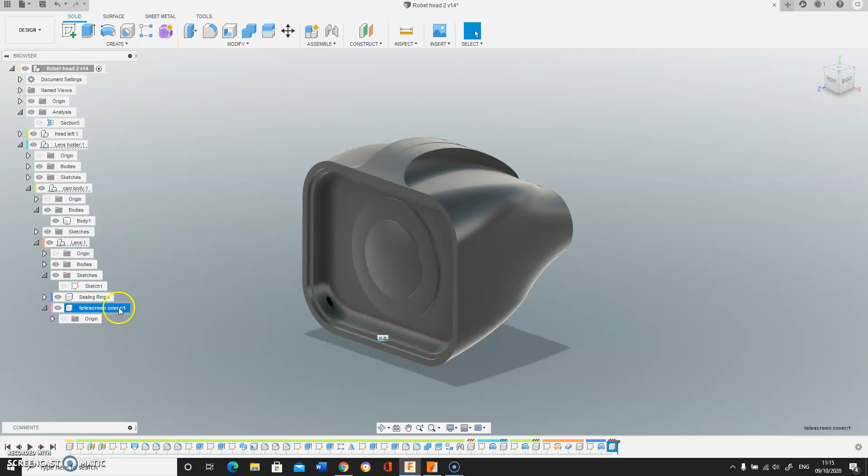In this video, I'm going to make a screen to cover all the lens and everything like that. I know you've already got a lens cover in here, but I want to make another one just to fit into this groove. So I'm going to start with a sketch.

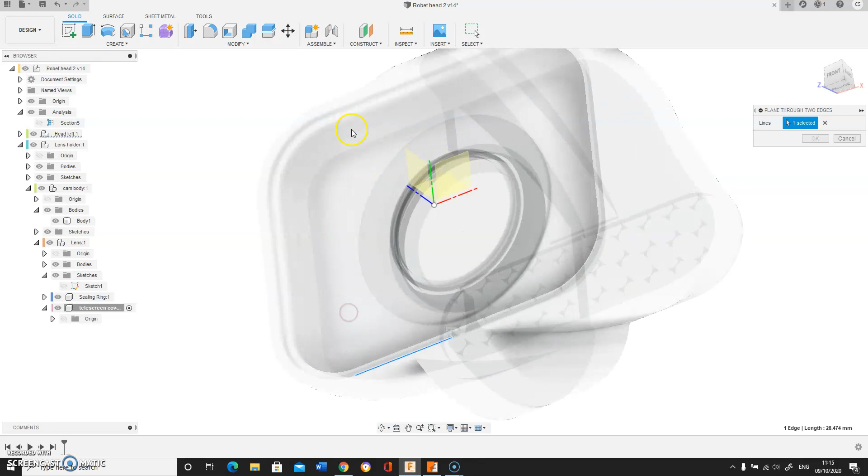I want to sketch it onto here. Now, when I select, because this is two parts, it could give me problems. So what I'm going to do first is create a sketch plane to work on. I'm going to choose the bottom of that inside edge, and the inside edge there, and it's going to generate a plane for me to work on.

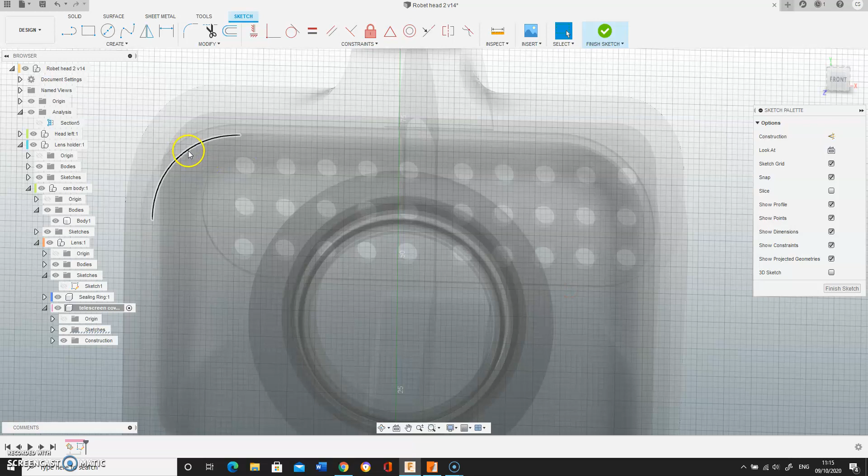So I'm going to sketch onto that plane, and I want to work inside that edge. If you look at it, it's not that edge, which is the inside edge, it's that edge there. So I am going to project that edge, make sure I'm nice and straight on, and go around and select carefully that edge.

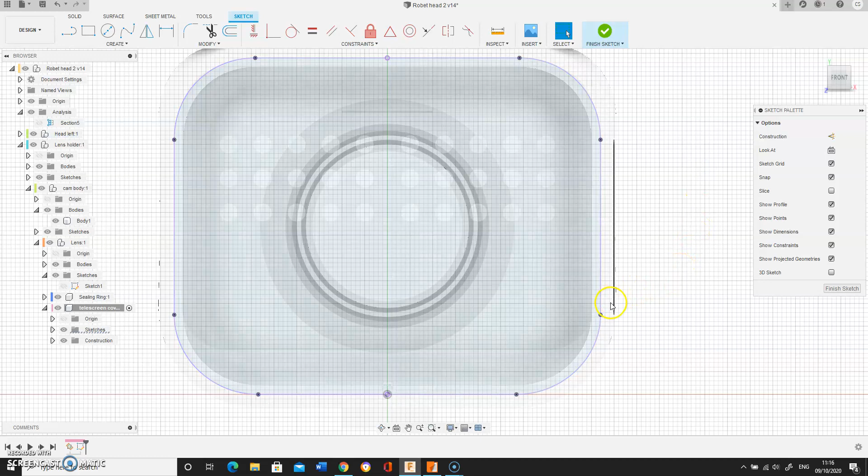So I've selected that edge like that. And I want to say OK, and it should go that nice blue color to tell me it's a complete enclosed shape, and I want to finish that sketch.

Now I've got that, which I can then extrude, and I'm going to extrude it, let's say a nice round number, to 5, like that. Let's have a little look at how that looks from above.

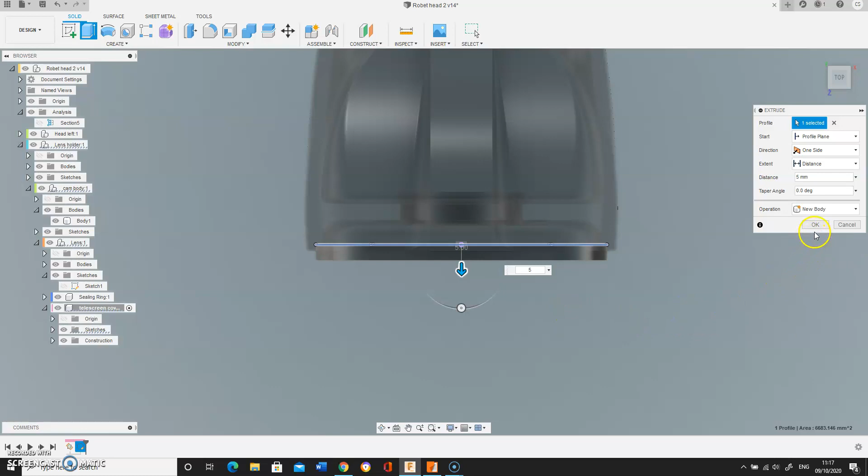Now I can see that's sticking out quite a way from the edge of my object. In reality, it would get damaged, and you'd probably want to recess it back into the inside of that cowl of the actual screen to give it a bit of protection. But I'm not that worried about it because this isn't real, is it? So I'm just going to leave it sticking out like that.

But what I'm going to do is fillet that edge. Now again, I could just go in here, choose my constant radius fillet, and fillet it back in. So let's have a little look to see what that looks like inside.

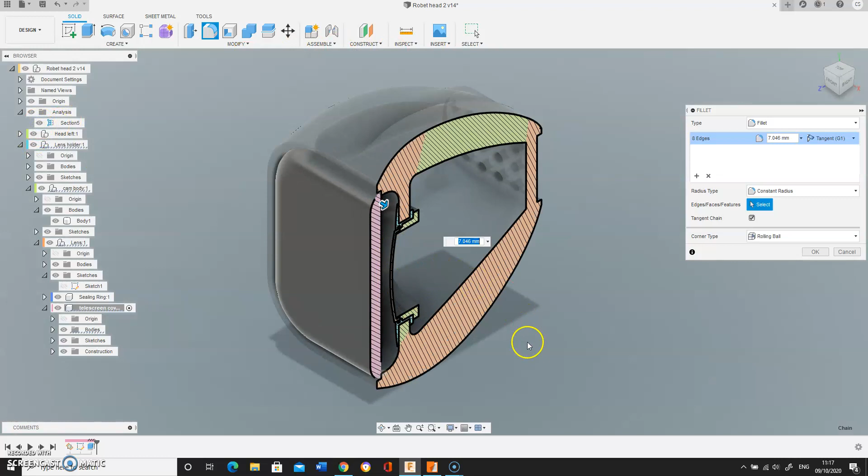Again, I want to inspect perhaps as I draw. Now, that would be difficult—there would be nothing really holding it in place. If I pull it out to there, about 2.5 gives me something to locate into here.

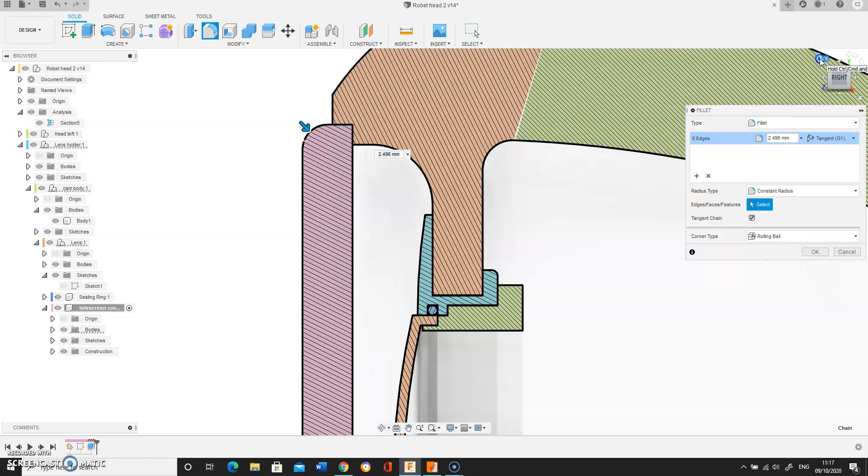Now again, I could have the same little rubber seal ring in here holding that in place if I want to go to that trouble, but I'm not going to bother. What I might do instead is put a variable radius on it. Obviously it would be a nightmare to manufacture, wouldn't be realistic, but I think it could be quite an interesting little task. Again, it's getting used to the commands and knowing what you can do, so when you're doing your actual project at the end, you can think, well, this is how I would do this, or I'll plan to do it this way because I know I can.

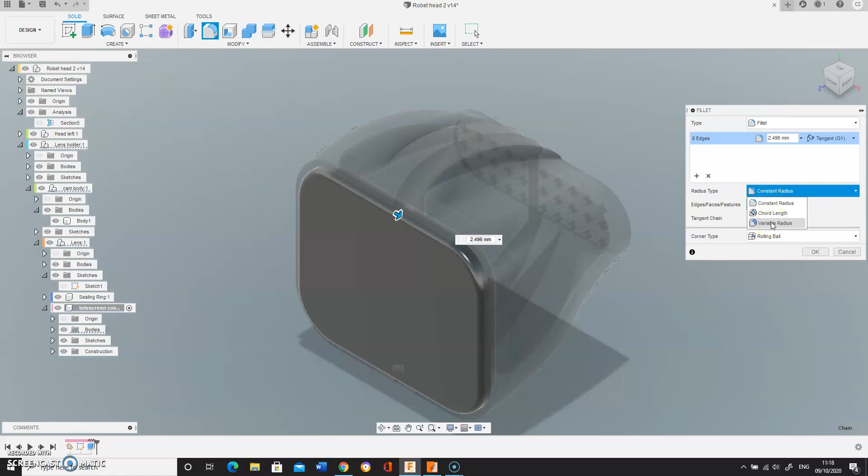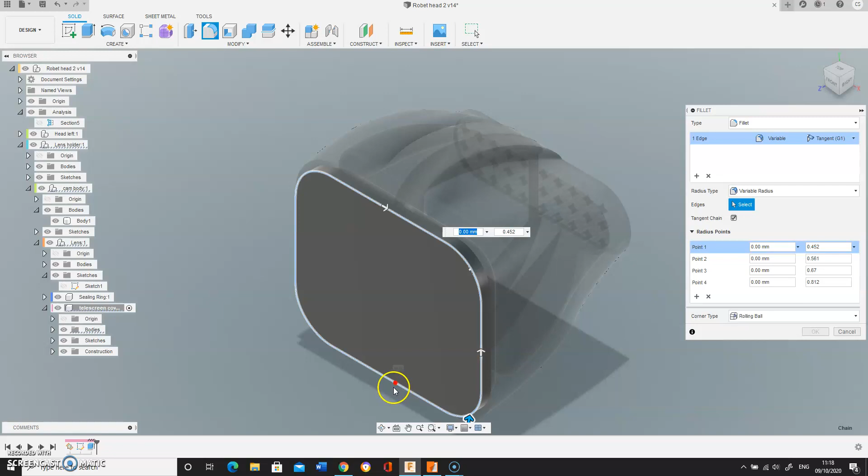So I'm going to choose my variable radius. Now it wants positions for points to make it vary. So I'm going to go along, and where it's projected from a projected geometry before, it has these little corner points, in the middle of each of the sections that I projected. Every time I click on one in the menu manager on the right hand side, it brings up another set of points.

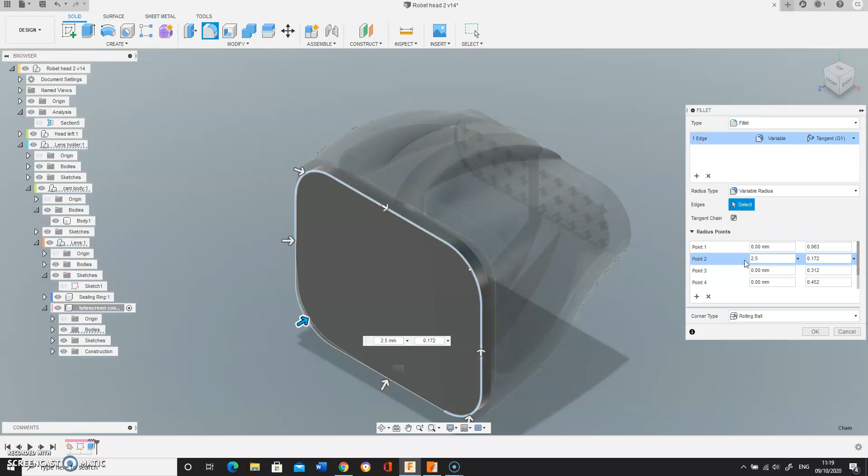Now from my little inspection earlier on, I've figured out that's point 1, so it goes back the way from the way I started. So I'm going to start with point 2. Now I said it couldn't be much more than about 2.5, so I'm going to put in 2.5 as my radius for that one. And the middle point I'm going to bring in to maybe 0.5, and hopefully it'll generate. It does.

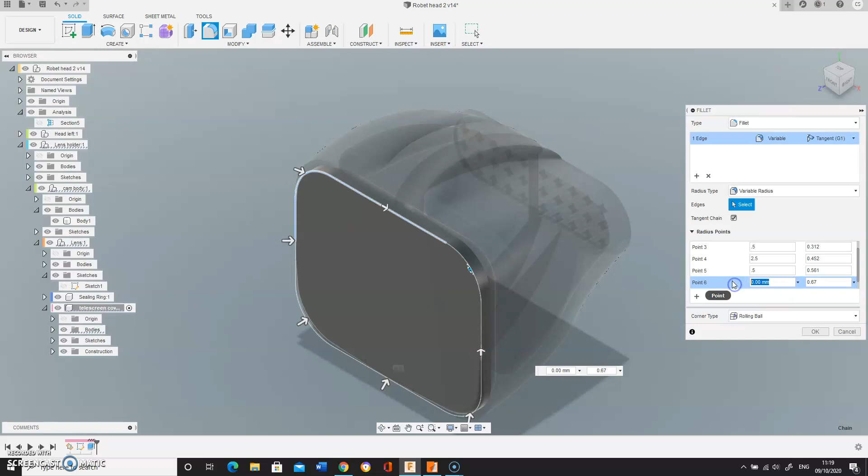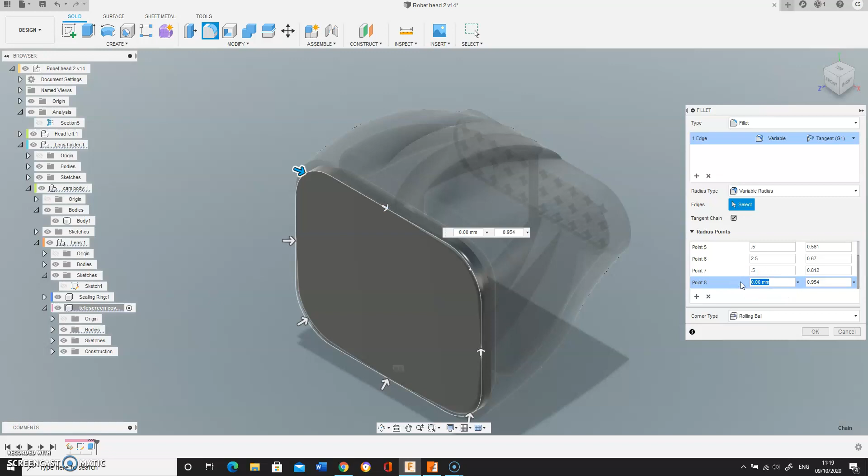2.5, I'm just going to work my way around. Yeah, that's fine, I've got 0.5. So the ones in the middle I'm making 0.5, and the ones on the corners I'm making 2.5, so it varies across the range of it.

And let's have a little look, see how that looks. That looks quite nice. Let's have a little inspect to make sure inside's okay. Yeah, no problem in there. So I'm quite happy with that.

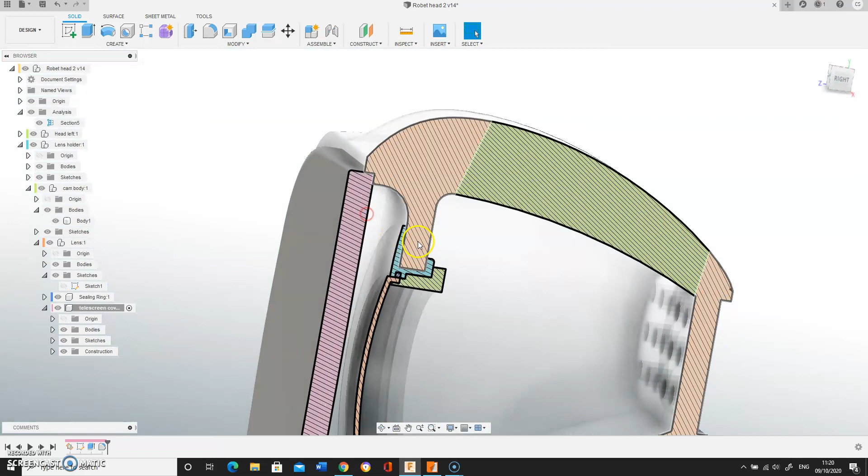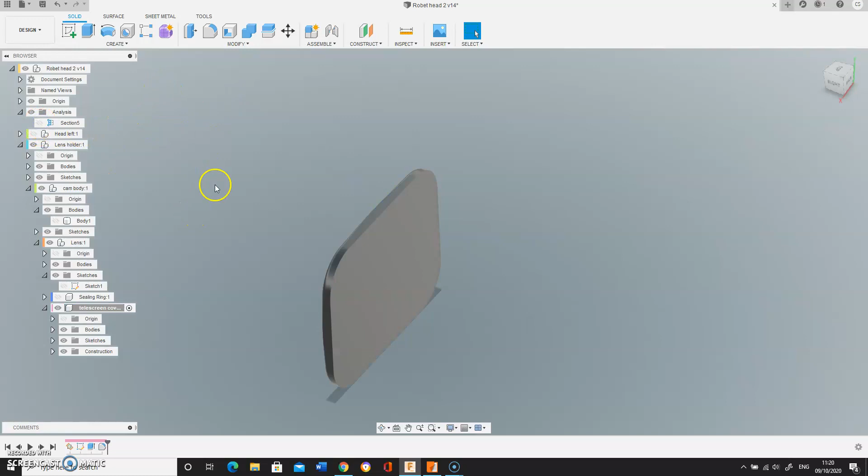Now, the only thing I need to do now is shell this screen because it's quite chunky, quite thick. So I'm just going to go into my screen cover and isolate it from the rest of the work so I can work on it without anything else getting in the way. And I'm going to shell that to a thickness.

Let's have a little think—what thickness do I want to make that? 1. Oops, I'm back to my 1 meter. Be careful with that.

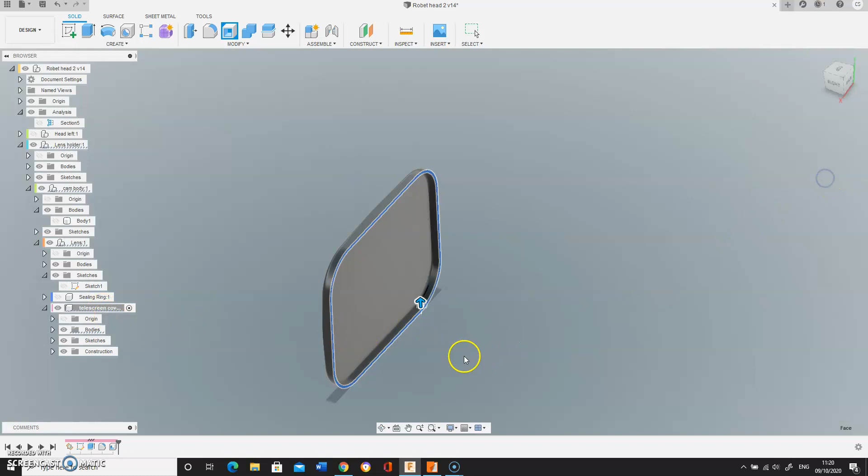So let's unisolate that and have a little look at it, see what it looks like in place. Yeah, that looks quite nice. I'm quite happy with that.

So that more or less is my head done. I have a hole put in for the neck to connect into, and I'll do that in my next video. Thank you.